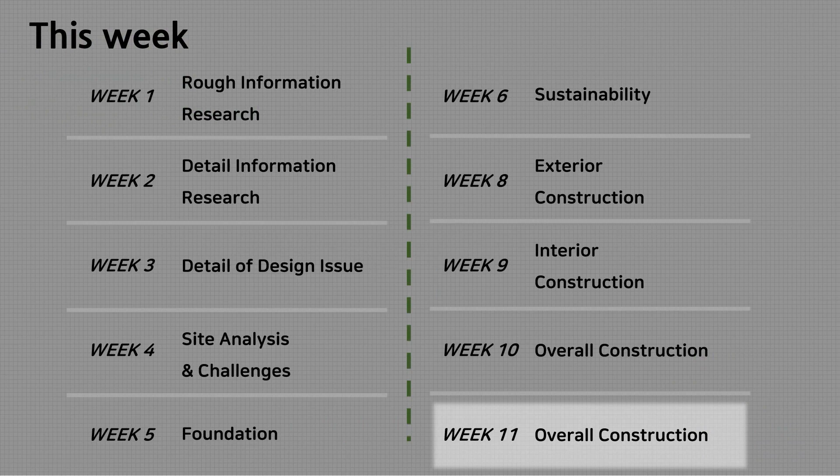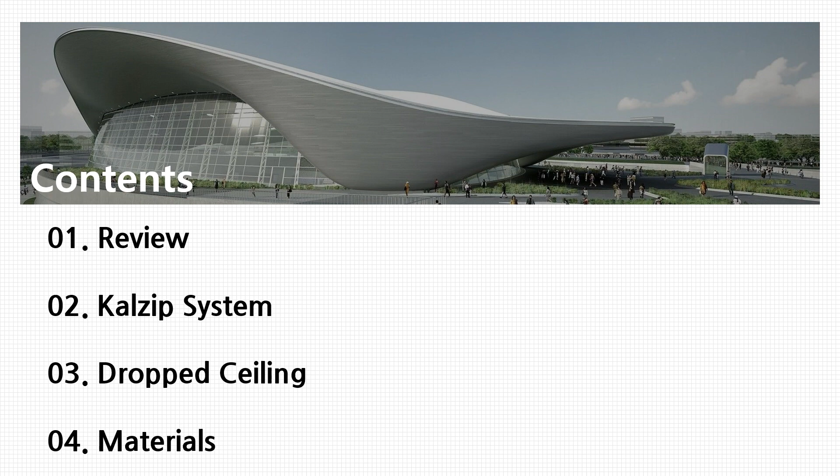Hi everyone, we are team number 10, London Aquatic Centre. This week, we'll continue to present the overall construction of our building. Beginning with reviewing last presentation, we will talk about the Kalzip system they used, drop ceiling, and material, and we're gonna tell you why they used this material in terms of our building system by further research.

Last week, we studied facilities such as ventilation, heating, and water systems. First, London Aquatic Centre employs a variety of ventilation techniques, including both natural and mechanical methods. They try to make the air move in a certain way. Air is supplied to the major event spaces using oversized ducts below the pool deck, providing the freshest air at the level of highest activity.

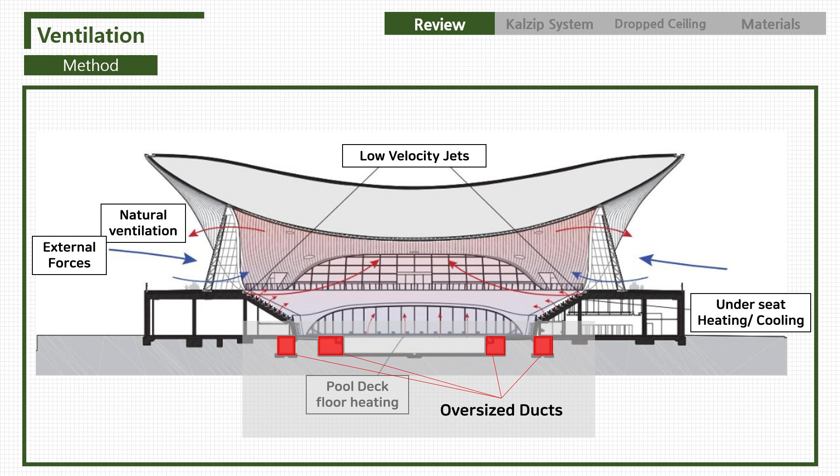To achieve heating and cooling, the water heats up the air at the base of the curtain wall, which then rises until it reaches the top, where it begins to cool and descend softly back into the interior. This continued movement of air also helps solve an even greater problem than comfort: condensation.

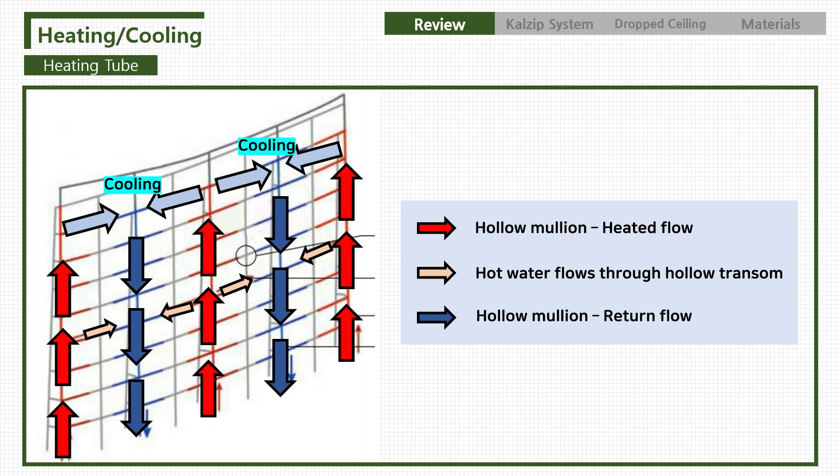Let's talk about the roof panel. You can see the wide smooth roof from the top. The roof of the center is made of aluminum sheet. How can a metal sheet smoothly cover a roof with such a dramatic form? The answer is in the Kalzip cladding system.

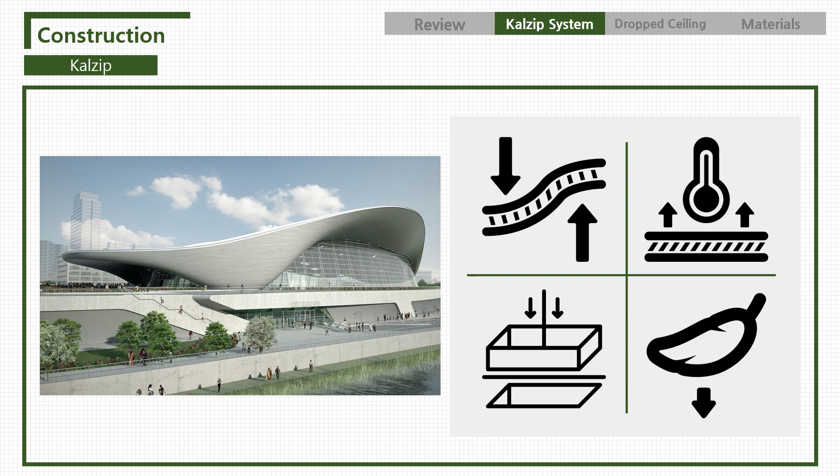This system is a flexible, water-resistant, easy to install, and lightweight construction system, which can be used on large building surfaces without difficulties. It has several key advantages that led the Aquatic Center to choose this system.

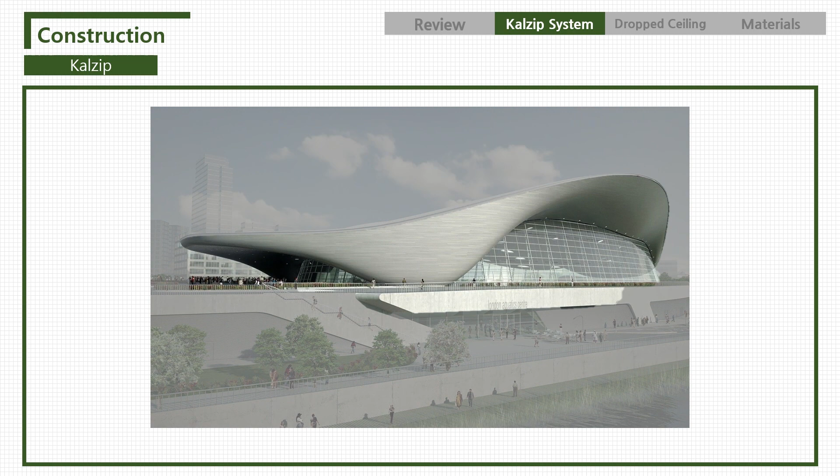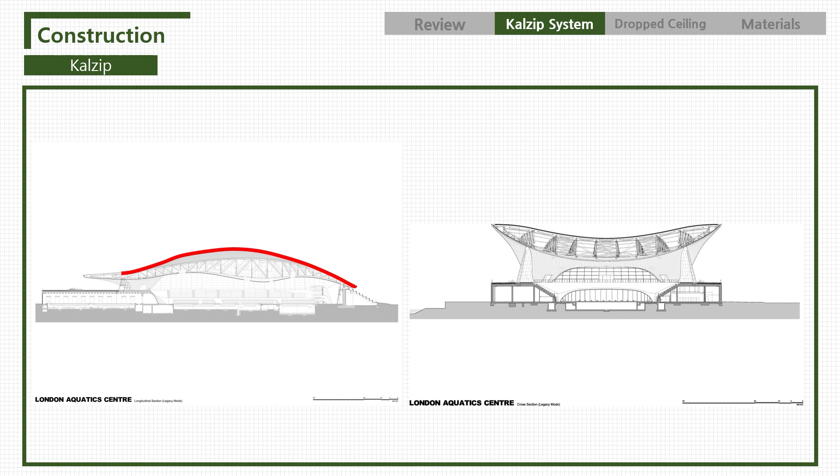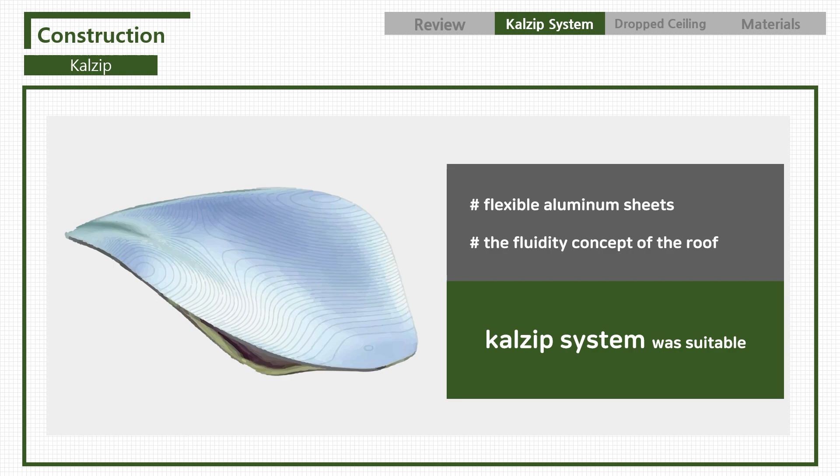First, it is specialized for individual design variation in unusual building shapes. The London Aquatic Centre is an unusual shaped building. Its roof is shaped like a wave, sweeping from up to ground, right to left. With highly flexible aluminum sheets, they can cover any curve or wave-shaped roof. To bring the fluidity concept of the roof into the real world, the Kalzip system was suitable for the center.

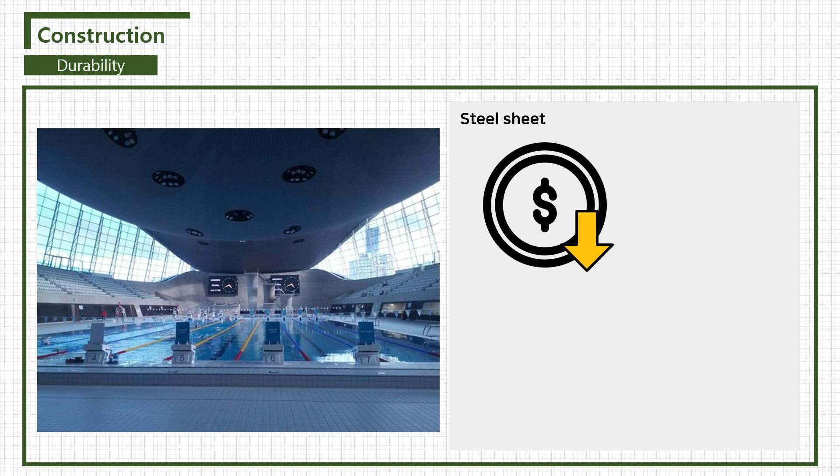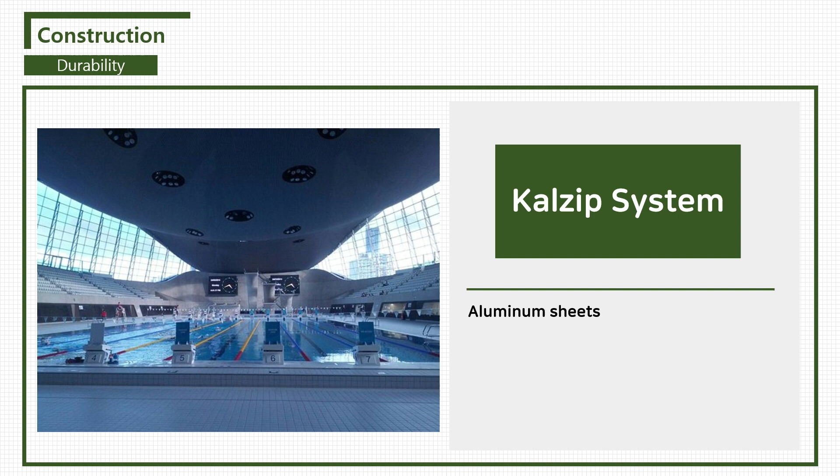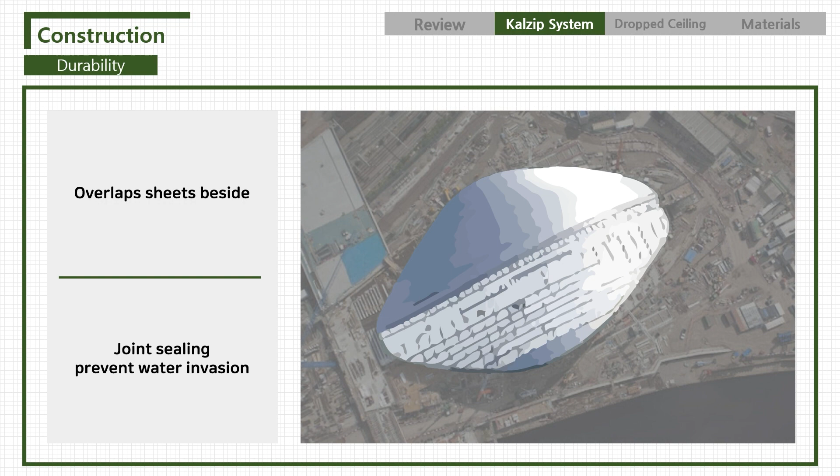Second, it offers exceptional durability. If you use steel sheets on a roof, it is more cost-effective and provides optimum loading and spanning capability. However, the Kalzip system used aluminum, which provides exceptional durability in buildings in humid conditions, such as swimming pools or wet industrial plants. Also, the aluminum sheets overlap each sheet beside it, and a seal at the joint of sheets prevents water seeping through into the roof structure. So the center chose the Kalzip system for its durability against water from inside to outside.

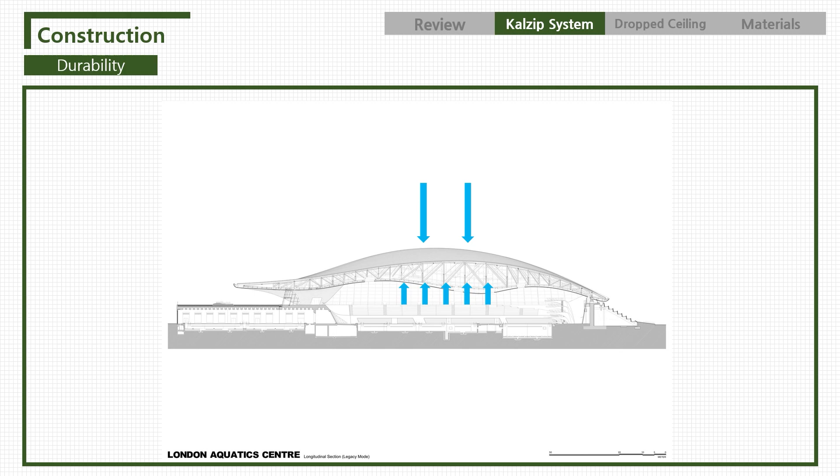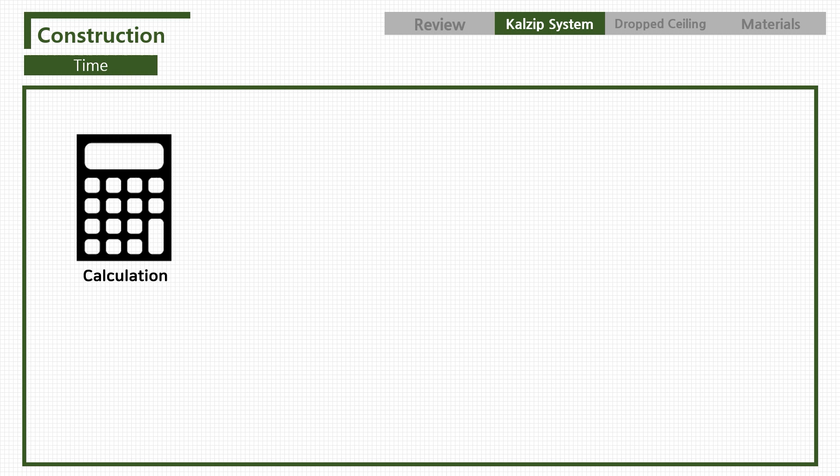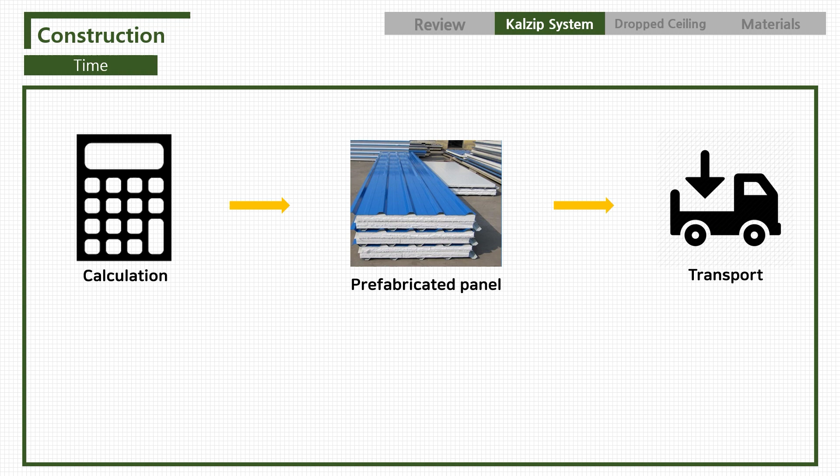Lastly, it shortened the construction time, as the center had a serious deadline due to the Olympics. Their construction time had to be scheduled effectively. If they made the roof in normal ways, they would have to fabricate the whole roof components and bring them into the site.

These steps cost time, and if the prefabricated components didn't fit, it would delay things further. However, the Kalzip system offers on-site production. The components don't have to be prefabricated and transported; instead, they could just supply the right sheet when needed. So overall, these advantages made the center choose the Kalzip system for their roof.

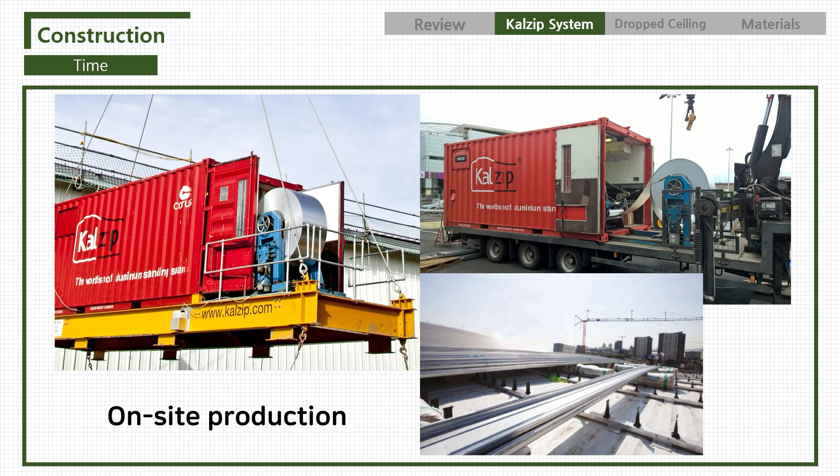Now, let's talk about the drop ceiling. A drop ceiling is a secondary ceiling, hung below the main ceiling. It may also be referred to as a T-bar ceiling, false ceiling, drop-in ceiling, drop-out ceiling, or ceiling tiles, and is a staple of modern construction and architecture in both residential and commercial applications.

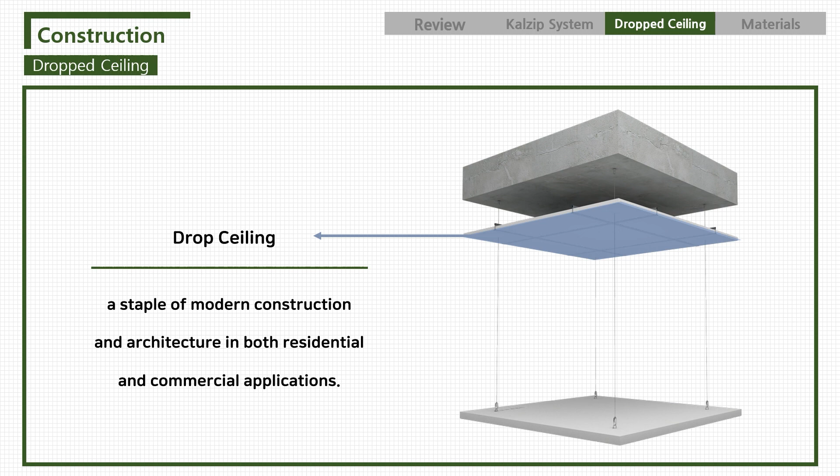The hanging ceiling in the aquatic center is a carefully planned and orchestrated element. It consists of 37,000 pieces of precision-cut Brazilian lumber. Each element of the ceiling is made specifically for the spot it is placed, including metal brackets.

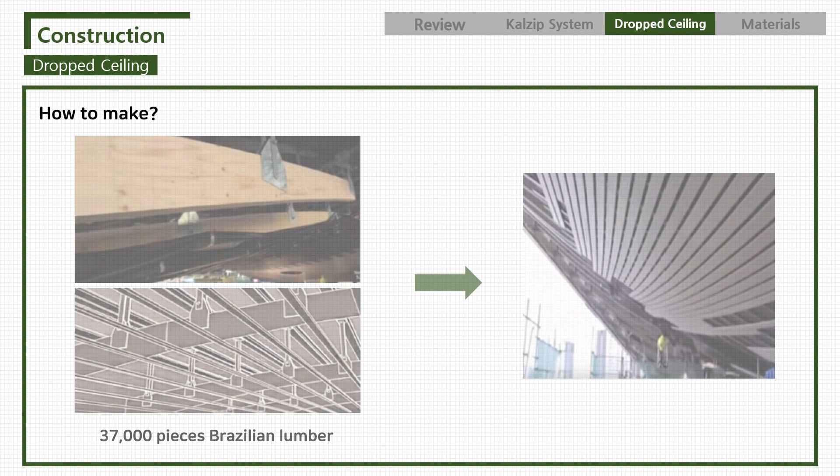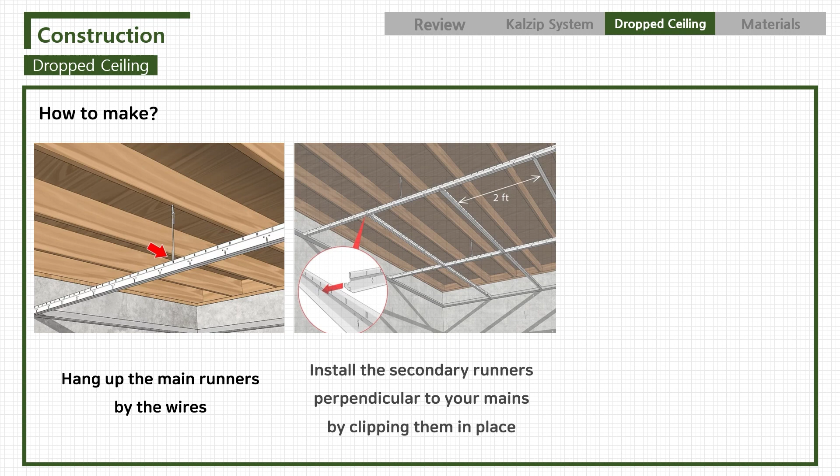Then, let's talk about how to make the drop ceiling. First, with the materials prepared, hang up the main runners by wires. Next, install secondary runners perpendicular to the mains by clipping them in place. Finally, lift the tiles through the grid and set them on top of the grid.

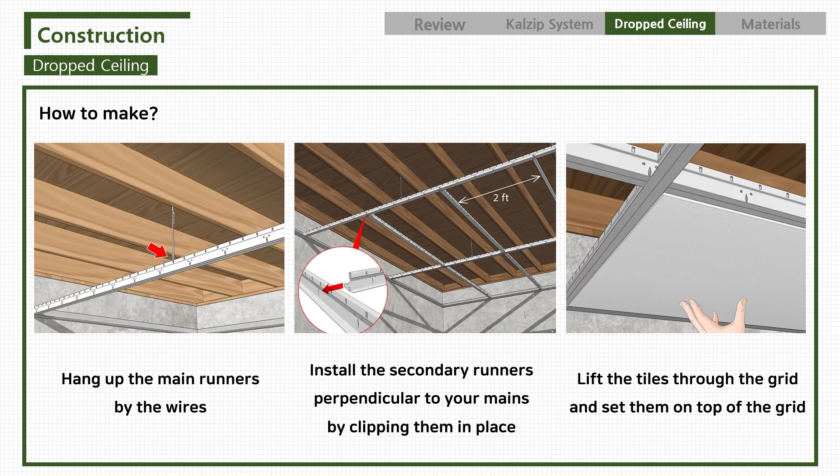Finally, let's talk about advantages of drop ceiling. First is ease of modification. Another advantage of drop ceiling is that the easily removed ceiling panels offer instant access to the plenum, which greatly simplifies repairs or alteration.

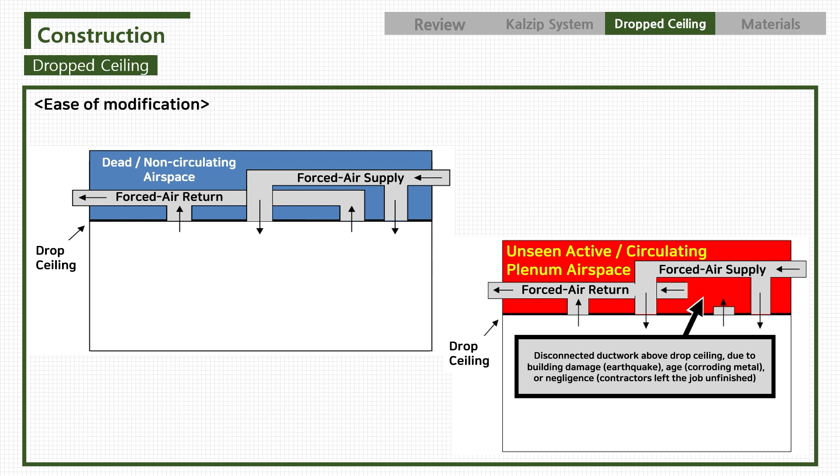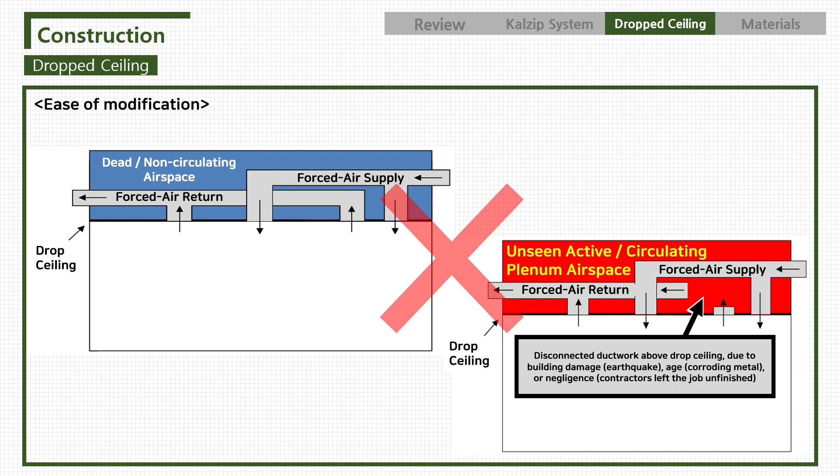Wiring and piping installed behind traditional plaster or wallboard ceilings are extremely difficult to modify once the finished ceiling is in place. Wires must be fished through hollow spaces in the walls behind the finishing ceiling, or the ceiling must be demolished for the changes to wiring or piping to be made.

In contrast, the tiles and other parts of a dropped or stretched ceiling can be easily removed to allow access to the area above the grid to do any necessary wiring or plumbing modification. In remodeling, thereby all components of the grid can be dismantled and reassembled elsewhere.

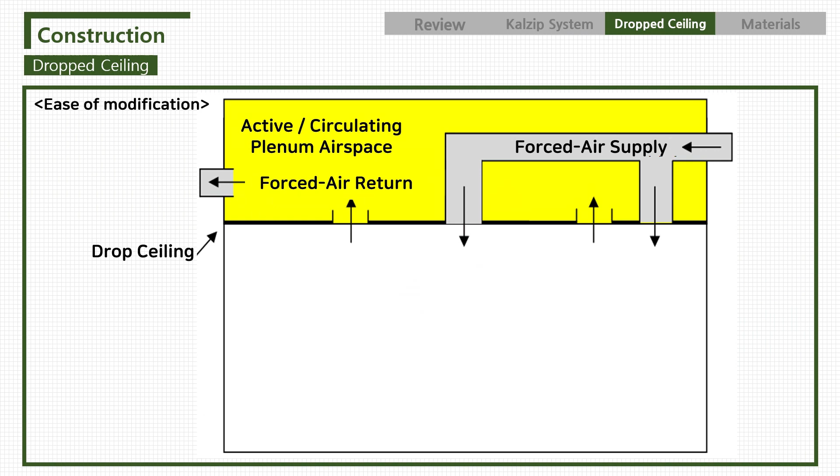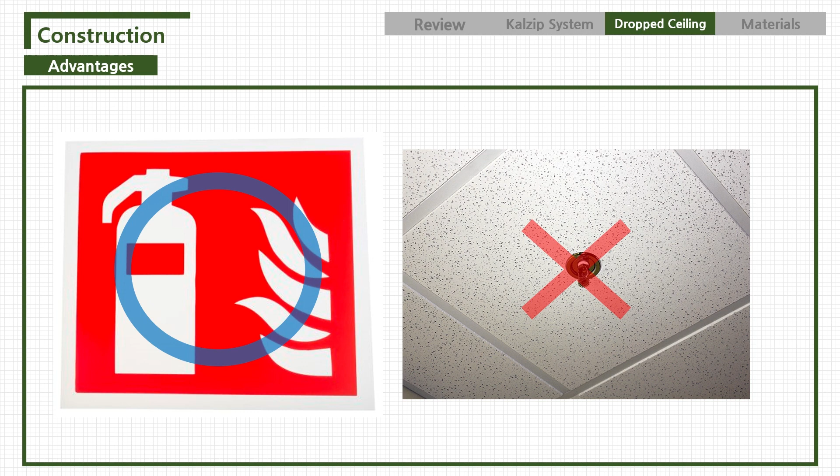To address fire safety, ceiling tiles made from mineral fibers, plastics, thin composite or fire-rated wood panels can be used within the construction to meet acceptable standard ratings. Drop-out ceilings have a further advantage since they can be mounted underneath fire sprinklers, thus hiding the sprinklers for a more attractive appearance.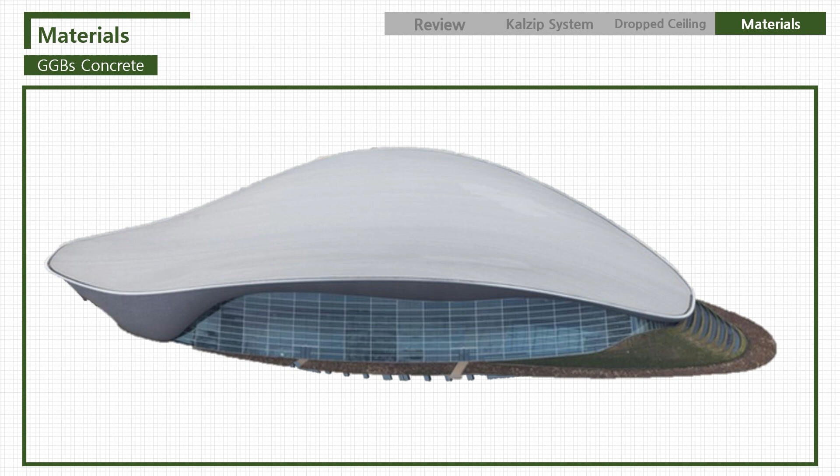And we will talk about how they use the two main materials to resolve problems when construction period at the London Aquatic Centre. One is GGBS concrete. The London Aquatic Centre doesn't seem to have much concrete use in appearance, but the London Aquatic Centre ground structure is a massive concrete structure.

The massive concrete structure have some problems. It could occur thermal cracking and need good workability of concrete because of its amount. And humidity arising from the pool can affect the durability of massive concrete.

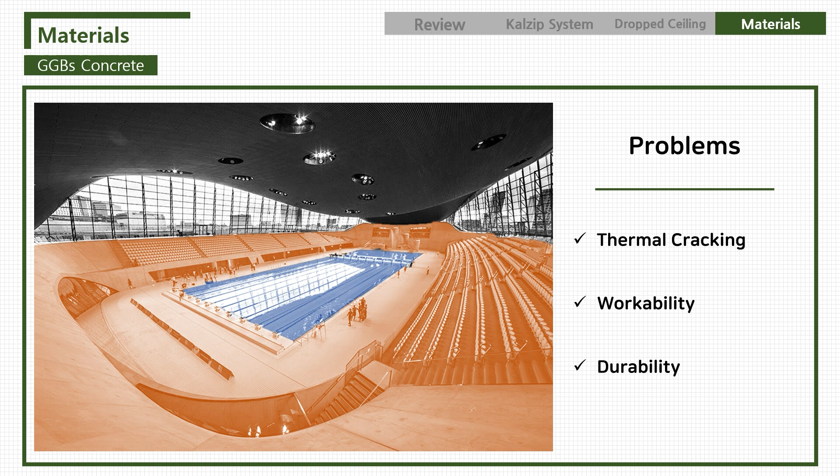First of all, let's talk about the thermal cracking. If the massive concrete structure, then there can be a large temperature gap between the center and outside during curing. In other words, because a lot of concrete at the center makes much hydration heat, the center is red color and the outside is blue color, became temperature difference.

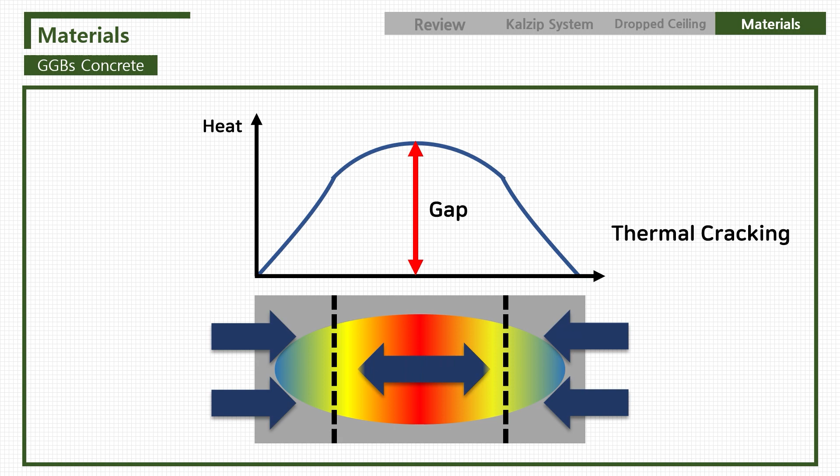The center part, which has high heat, expands. On the other hand, the relative cold outside part gets shrinkage. This difference caused the thermal crack.

To prevent the thermal crack, the London Aquatic Centre used ground granulated blast furnace slag. The GGBS is a concrete admixture obtained from the blast furnace and can replace the Portland cement about 40 to 50%. The GGBS reduces the hydration heat of concrete so that the massive concrete structure can maintain an even temperature state.

So, when they use GGBS concrete, the temperature gap between the center and the outside part gets smaller. The thermal crack can be prevented.

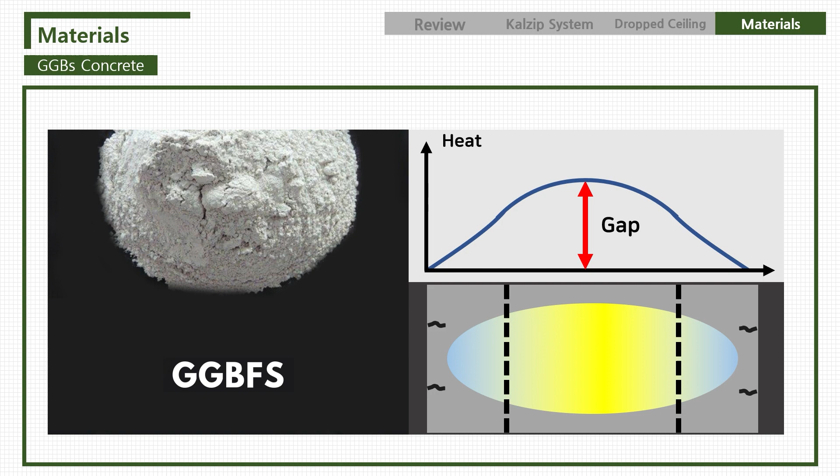And the GGBS particles have a very glassy texture that makes them increase the workability. This can help the reduction of water to get adequate workability in common situations. In other words, good workability can reduce construction risk so that can ensure the scheduled construction period.

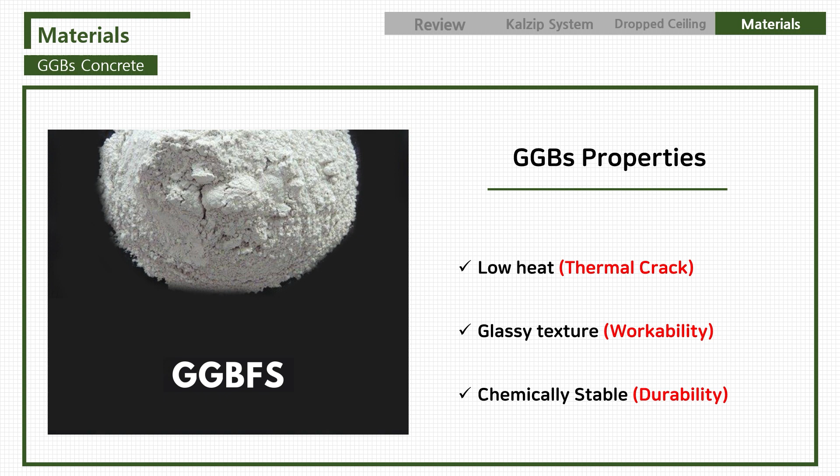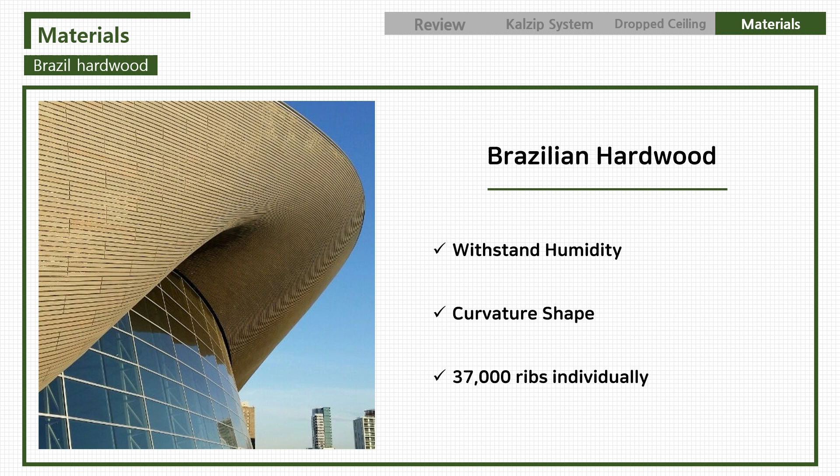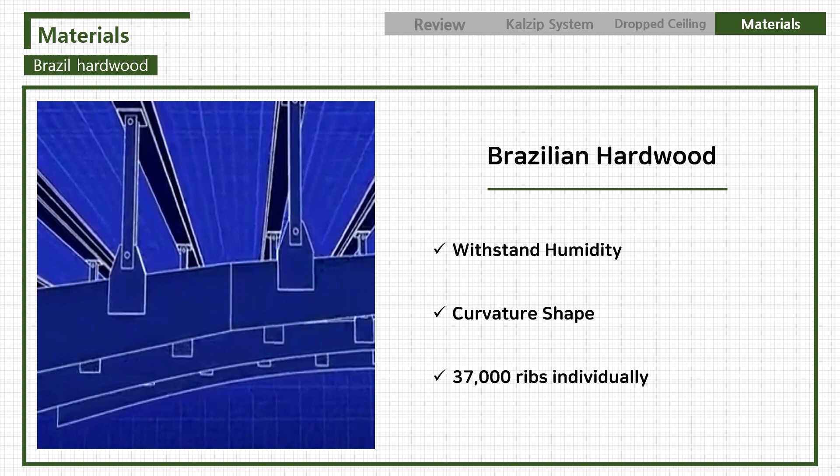And the Brazilian hardwood can make the roof's curvature shape by cutting 37,000 Brazilian wood ribs individually. The 37,000 ribs have their position, so each rib should be installed in the right place. The installation proceeds as follows.

The lightweight of wood ribs relative to steel or concrete can make the workers directly install the ribs on a lift and put it in its own place.

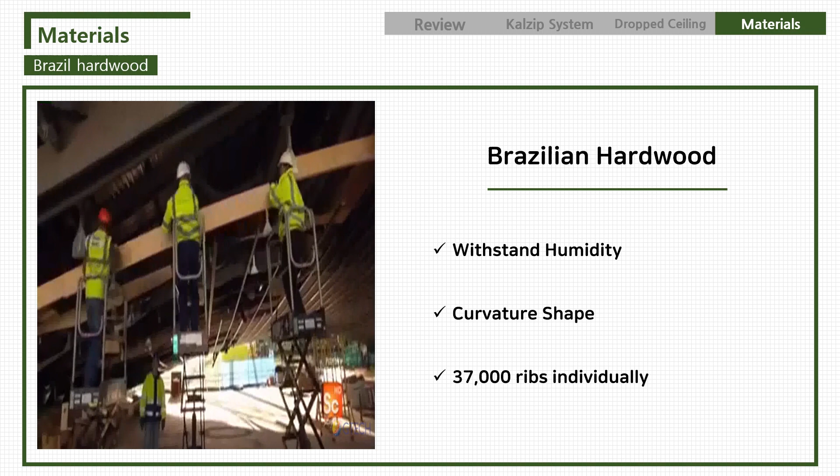This is our end of presentation, and next week we'll sort out the important information and do the final presentation.